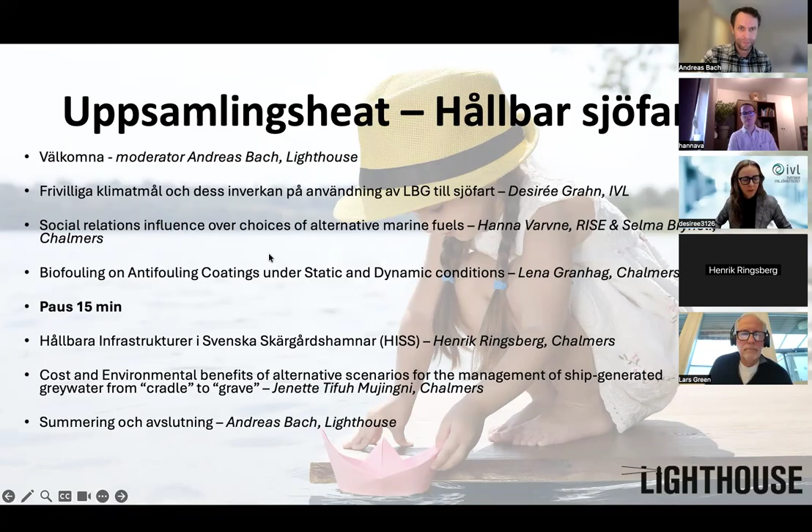Great to be here, nice to see you that I can see. My name is Desirée Grahn, I'm a project leader at IVL Swedish Environmental Research Institute.

I will present the project we have run that just been finalized, called Voluntary Climate Targets and their impact on the use of LBG in shipping. As Andreas mentioned, I've worked a long time within the biogas sector, but not that long within the maritime and shipping sector, so I'm very excited about this and learning about it together with my colleagues who have worked in that sector for a long time.

This project we have done together with Uppsala University, Björn Samuelsson there. Let's see if I can switch the picture. Can't see that I can, maybe here. Did you see the next picture now?

Yep, great. So this is the outline of my presentation. First a short introduction to IVL, then what our project has been about, and then some parts of the project: voluntary and legislated climate goals, mass balance-based models, and impacts on the use of LBG within shipping, and then some final remarks and next steps.

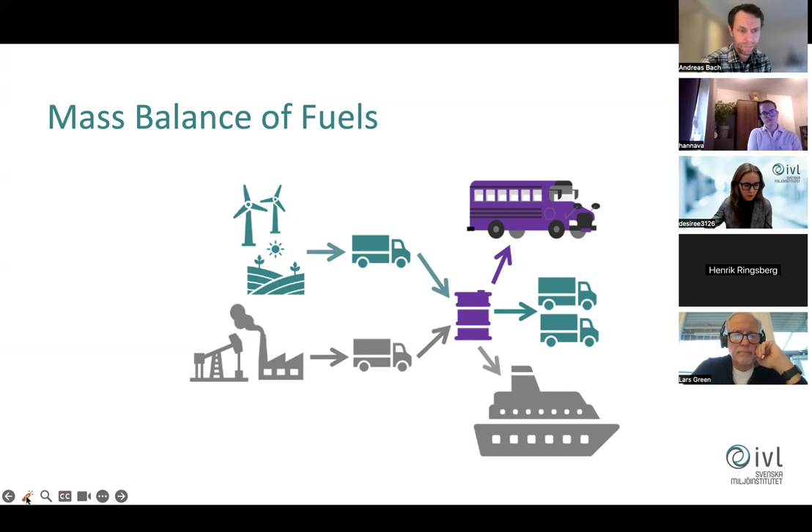Other than this type of setup, let me just turn off the pointer. You can also have a financial setup where one stakeholder is using the green fuel, reduces the emissions, but someone else is buying the emission reduction from the stakeholder. So they aren't actually using green molecules, but they're buying it from someone else.

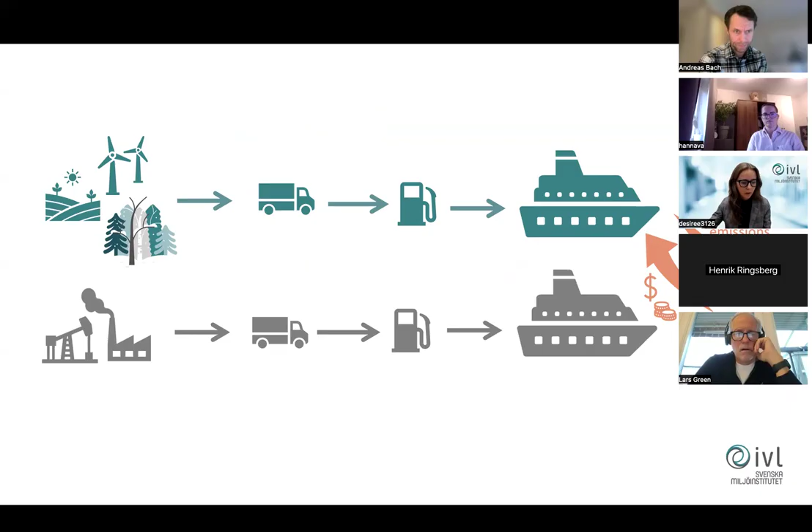So this could have consequences for the use of LBG in shipping. If we can't use mass balance-based tools, we could see a rapid increase in transport cost per cubic meter, which we have done calculations for in our report. It could lead to a higher price due to increased demand of locally produced LBG, which will take a lot more infrastructure and take longer time to get in place. That could also slow down the development of new production, since we use a lot of mass balance-based tools right now.

But we are thinking that it might lead to an increase in production of Swedish LBG, since we have to have it locally, close by. The biogas producers in Sweden, a lot of them that we've spoken to, don't agree with us on this, but let's see.

Reliable third-party certification is key to making this fly, to making stakeholders willing to use these mass balance tools. So I'll lift that again.

So just some final remarks. As we've seen working with this, a dear child has many names, as we say in Swedish, kärt barn har många namn. We have a lot of different names for these mass balance-based tools. They are often mixed up, and it's not very clear what is what. So we have tried in this report and this work to clarify what is book and claim, what is offset, what is inset, to begin to get an understanding.

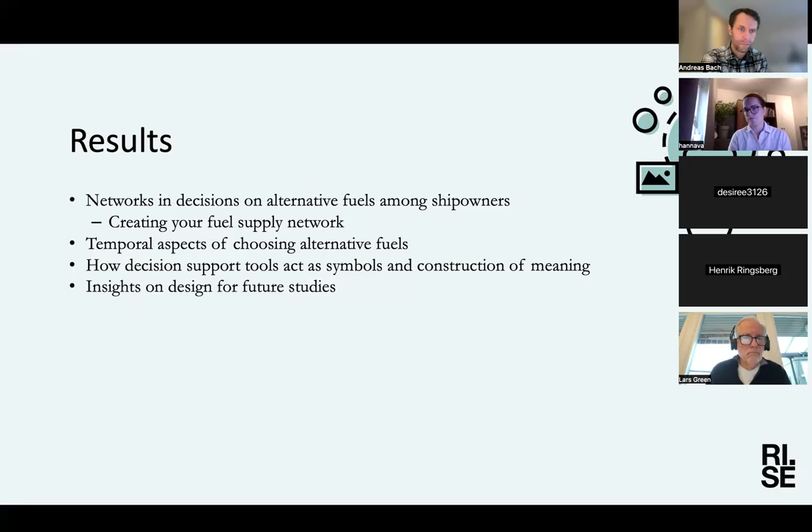So for future studies where you want to discuss these social relations or decision processes around alternative fuels, we believe you need a very strong connection to the organization where you investigate this. We are suggesting it should be close to an industrial PhD, or a very elaborate choice from the participating organization to share this kind of knowledge. One might need to be a bit cautious about how to design these studies in the future, because a lot of things are tangled up with trade knowledge and therefore very sensitive for commercial reasons.

If I can get it started.

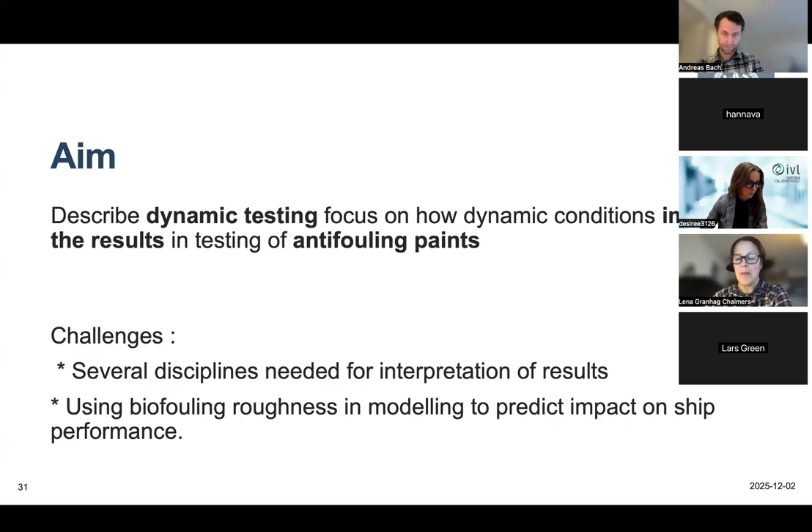Now I would say that the status in this area is that we work towards collaboration between industry and academia, as the paint producers have for a long time been doing dynamic testing, however from the angle or perspective of looking at the durability of the paint and how resistant the paint is over time.

Although these are not openly available results, we at least can have this discussion on a conceptual level, and what needs to be included. Somewhat closer is the aligning of methods within the research field to achieve sound interpretation and, above all, to be able to compare our results.

I would say there is a consensus between the industry, the paint producers, and the research too, that there is a need for standardization in the dynamic testing.

What we did, our method was a literature overview. We went through the most recent literature and found out that literature on dynamic testing of antifouling coatings is quite scarce, about 30 publications.

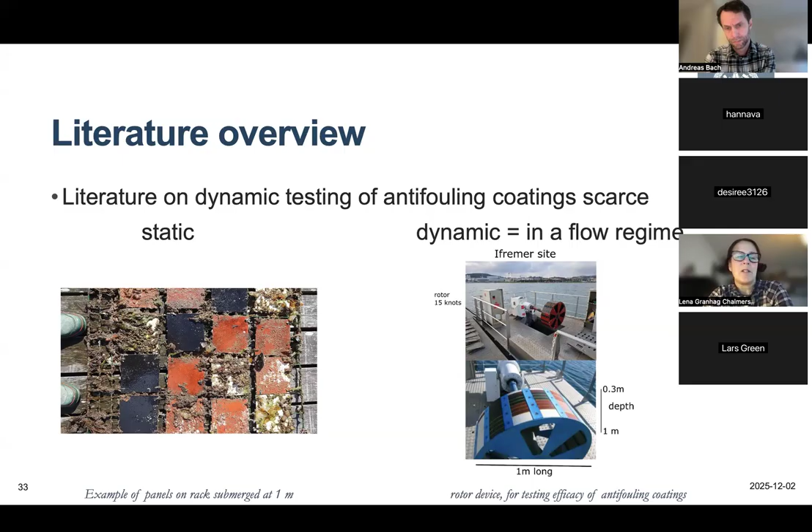While static testing, shown to the left, is really widespread with a lot of studies where you submerge panels in the port or harbor and let them stay there for like 6 months. To the right, you have dynamic testing, where you expose panels painted with different antifouling paints in a flow regime of some sort. This example is a rotor device for testing efficacy of antifouling coatings that has been used in the Mediterranean.

When we compiled the recent literature, we looked at what biofouling type was used, the dynamic setup used, and summarized the findings that were due to the dynamic condition.

From the results, we could see that under dynamic conditions, there was impact on the slime layer, which is the very first thin layer that consists of microorganisms like bacteria, microalgae like diatoms, and larvae of the organisms that will grow into the mussels and barnacles we can see. They have larval stages that also belong to this slime layer, and in addition, this slime contains a matrix of extracellular polymeric substances, which is very important for the attachment.

We could see that most impact was seen on the foul release coatings, but that doesn't mean they did better or worse, it just means they were more impacted. They could, for example, have more or less different organisms attached, or the attachment could be stronger, or they could be more strongly attached within this slime layer.

Now I'm starting to give you more information on the biofouling on the surface. The smallest organisms attached are about 1 micron, and then we have algal spores that are 10 times larger, but still very small. Everything is within these extracellular polymeric substances, meaning they cannot be viewed as single organisms, but rather as components of this layer. To the right you can see a larva of something that will later grow into a barnacle, and then the size gets quite much larger.

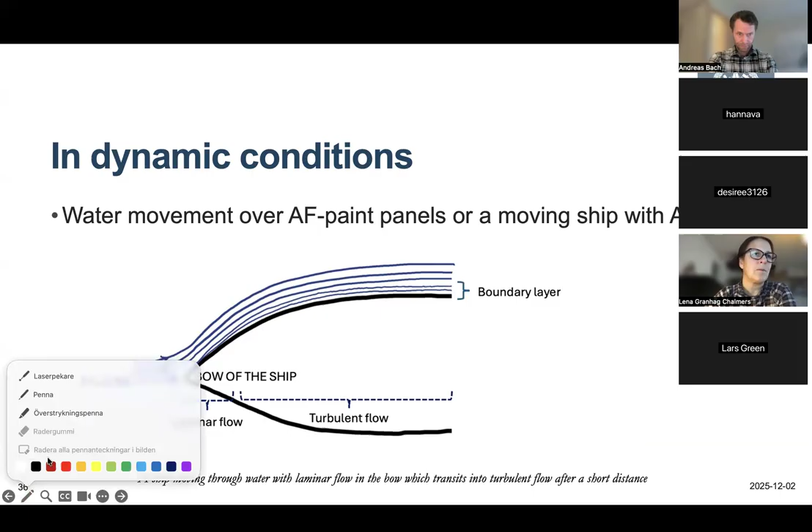If we look at what happens around the ship, the ship moving through the water will create a flow. In the bow of the ship, for just a few meters, you will have a so-called laminar flow, and then later it will turn into a turbulent flow. Just next to the surface, you will have something called a boundary layer, which is where the water flow is affected by the ship hull, or by being close to a surface.

So zooming in, the laminar flow will be water velocities that decrease when you get closer and closer to the ship hull.

And then later, when you have a turbulent flow, the water velocities will also decrease the closer you get to the ship hull, but there will also be a lot of those swirls or eddies, and the velocities will not be as parallel as they are here. Turbulent flow is the most common out in the sea and around the ship.

But every time you get really, really close to the surface, you will have something that looks like laminar flow. And at the very surface, there is something called a no-slip condition, where you have actually no velocities at all. For each velocity arrow, you have a corresponding force, which is what the barnacle will experience.

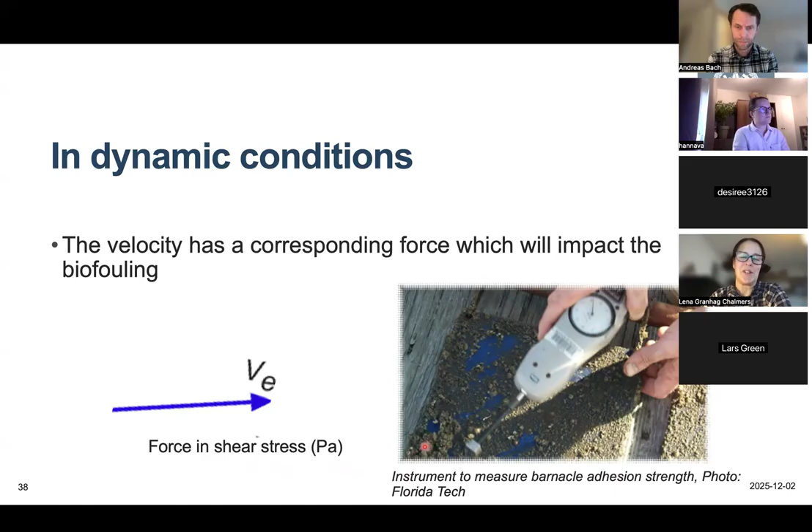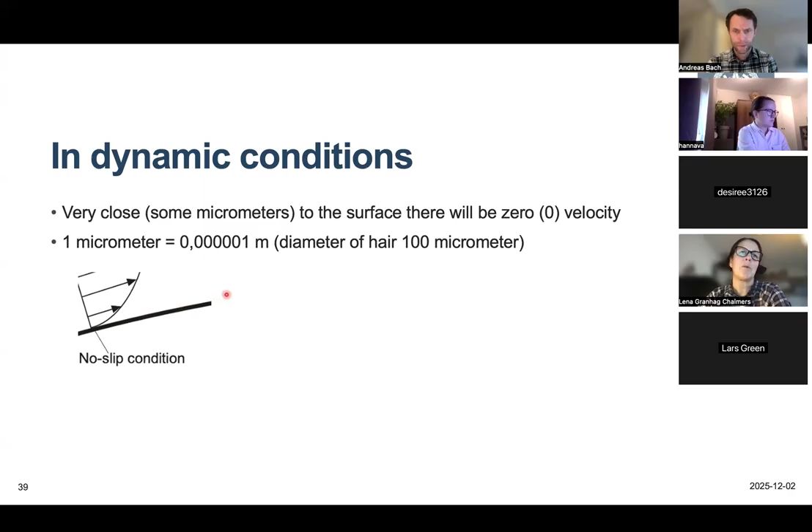It is a very close layer, the layer very close to the ship, just some micrometers from the surface, where there will be zero velocity. A micrometer is very small - the diameter of your hair is about 100 micrometers. So we are at really, really small scales here.

If we zoom in, the microalgae that I talked about that are in this EPS slime layer are about 10 micrometers, meaning they can hide in this layer very close to the surface where there are almost no velocities. So they will not be exposed to the force, and they can still be in this layer and use their glue and adhesive to attach. Where you have larger organisms like the barnacle larvae, they can also go in here, but of course they will experience some higher velocities.

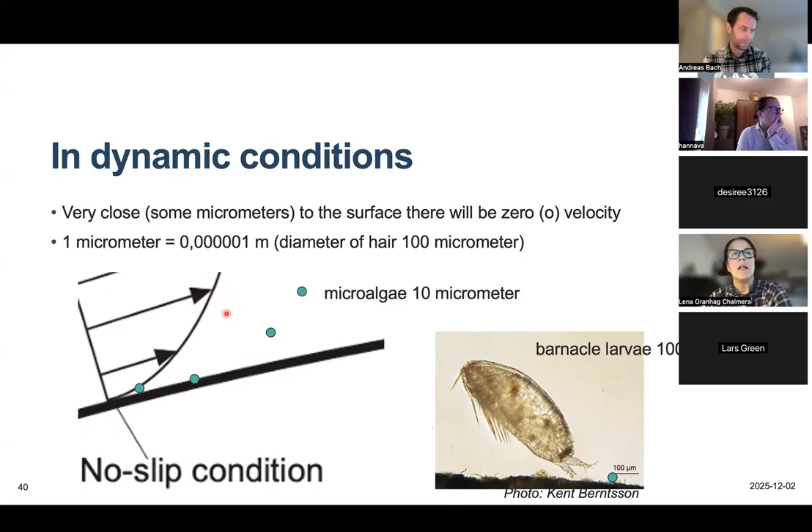I showed you two examples. It's said that about 4,000 different organisms live as attached life forms, meaning they only move when they are in the larval phase. Then they stay attached for 2 to 5 years, and they need a strong adhesive. The glue can look different - mussels, for example, have those threads of glue, and the barnacle instead adheres with a large part of the animal.

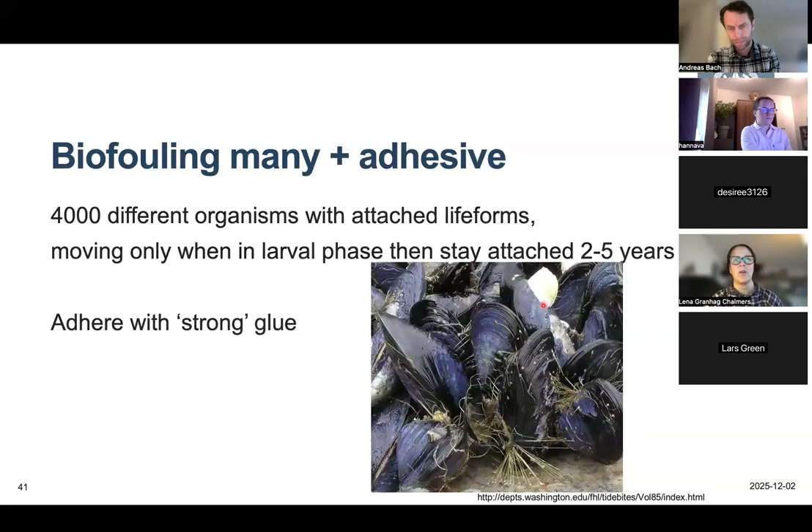And we want to see what happens in the dynamic conditions. It's not difficult to create dynamic conditions - there are actually a lot of different devices around, for example flow channels or flow tunnels. You can have rotating cylinders, sometimes called drums, or rotating discs, or you can actually expose your biofouling on a boat.

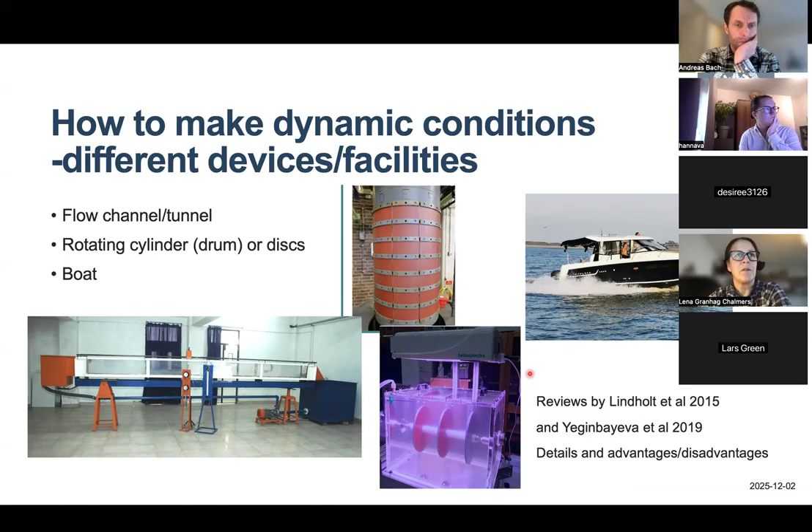There have been two reviews recently explaining the details of those and their advantages and disadvantages. So we instead went for the most recent literature, as I said. One thing that I pointed out was the difficulty of using this biofouling roughness when you want to translate it into ship conditions.

To achieve the most accurate results in this type of work, you need to use towing tanks. This is the large-scale testing facility used when trying out different boat models to see the resistance before they are built. They are around in some parts of the world, and they use already standardized measurements. However, it's very costly and time-consuming to perform this type of work, but to have really accurate results, you need this type of facility.

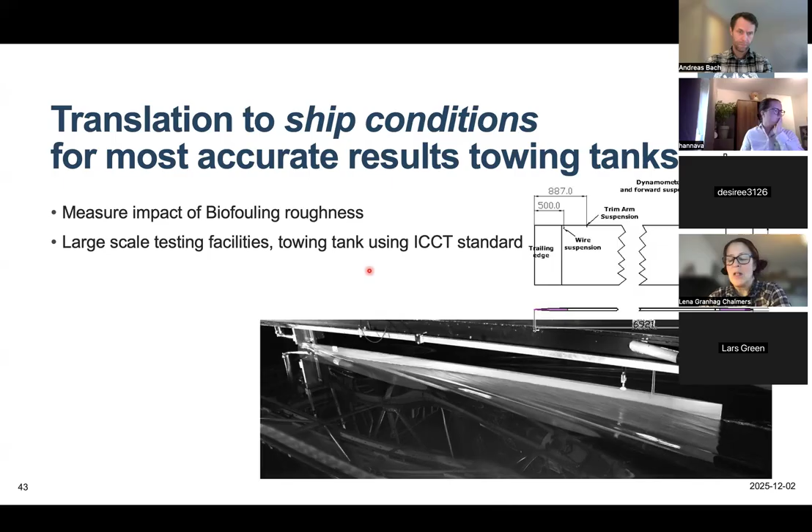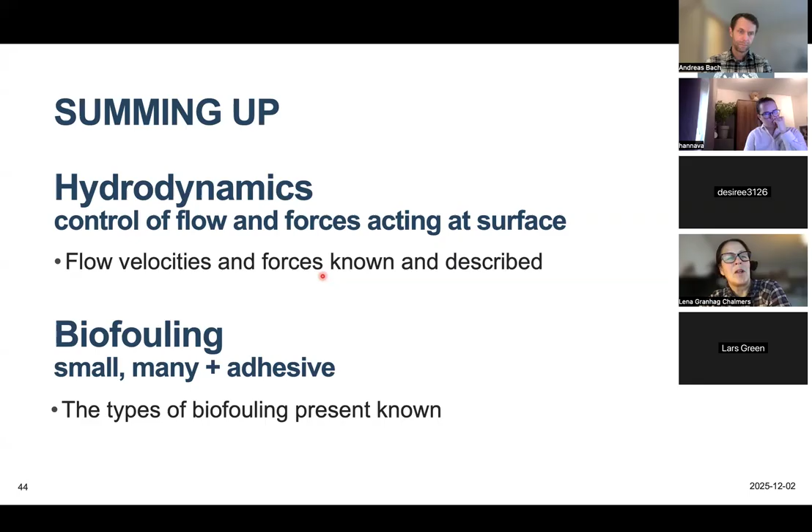And to sum up, for hydrodynamics, you need to have control of your flow and the forces that act on the surface, because otherwise you don't explain well enough what you actually have, how much force you have placed on the biofouling. You should also remember that the biofouling organisms are really small, there are many different sorts, and they have different types and strengths of adhesive. The types of biofouling you work with, you also need to know to get those characteristics.

So what we did was compare the static immersion tests with the dynamic immersion tests, and we looked at the main differences. The purpose you will use it for is the most important thing, but the big thing is that static immersion tests are quite easy to standardize, while dynamic immersion tests are more difficult to standardize. So that is where we are right now - working on how we could standardize those tests.

So you need to select your dynamic method depending on the purpose of your testing, and you need to be aware that several factors will impact the results. To solve this, we suggest a multidisciplinary approach, combining biology, hydrodynamics, surface chemistry, and physics to be able to interpret the results accurately, and again, work towards a standardized approach. Yes, thank you.

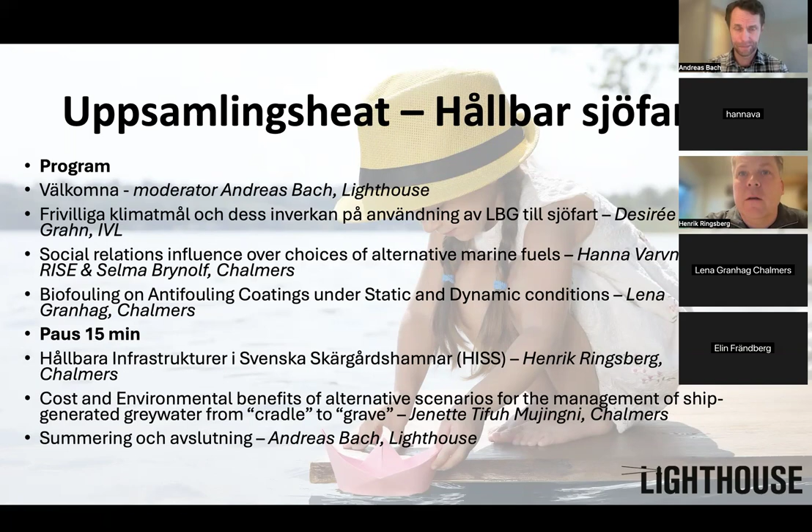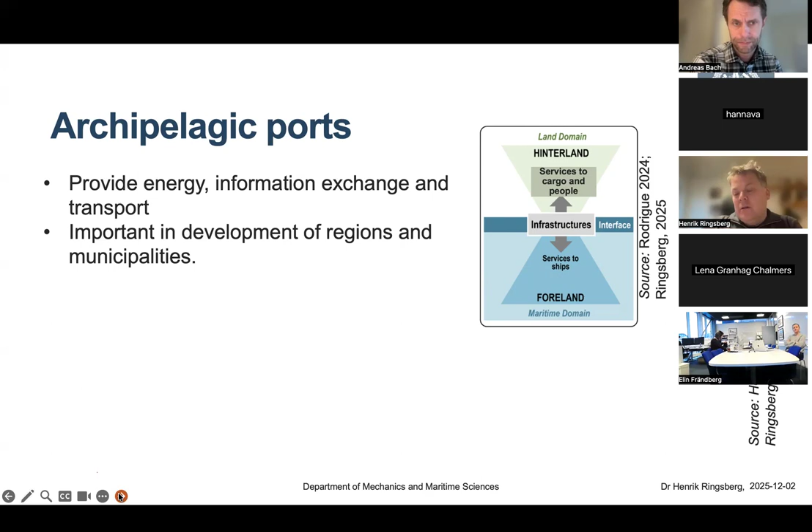As you already know, archipelagic ports have become increasingly important due to provision of energy, information exchange, and transport, but also due to the development of regions and municipalities. In addition, the industry has received increased requirements regarding development, sustainability, and demand for multimodal, intermodal transport in the nodes of transport systems.

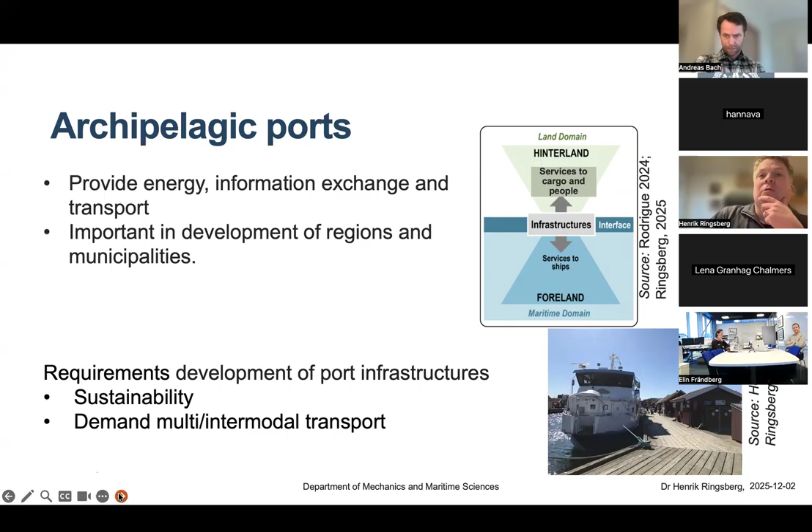So the HISS project focuses on regulatory policies and strategies in development of archipelagic ports at public and local authorities, but also on challenges that public authorities experience in their societal planning of archipelagic ports.

We used the following two research questions to explore policies, strategies, and challenges: which challenges exist in planning of sustainable development of archipelagic ports, and how do regional and local authorities comply with these regulatory requirements on sustainable development of such ports?

We started with a structured literature review on the subject, which was later followed up with a case study of regions, local authorities, and port authorities. The structured literature review looked into scholarly papers, but also published strategies and regulations found at EUR-Lex, IMO, and the Swedish Parliament.

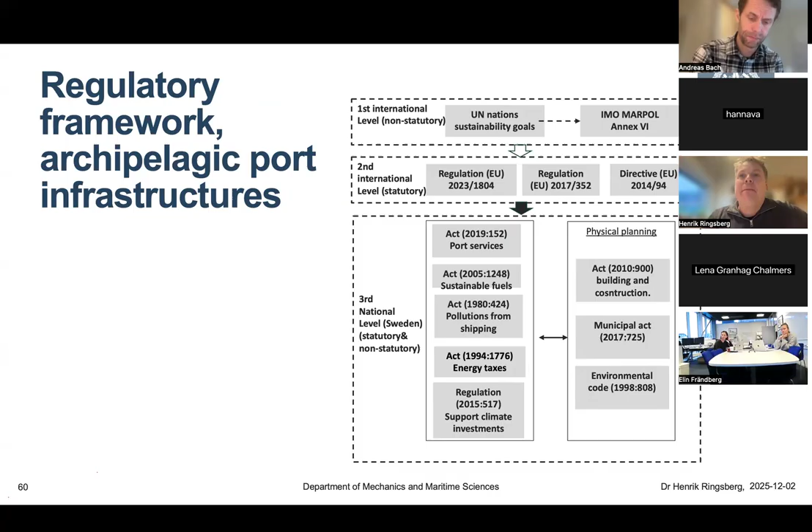When it comes to stakeholders' regulatory compliance, and especially their knowledge about these addressed regulations, we found that all level stakeholders lack in some way knowledge about regulation, especially on the first, international level. Regional level stakeholders possess knowledge on regulation at the second and third level, and local level authorities possess knowledge on the third level, which includes physical planning.

We also found that many master plans are not updated and thus need to be updated, since they have not been updated for 20-25 years. We also found that there is a gap between statutory acts at the third, national level and implementation of regional policies.

When it comes to challenges, we found first that challenges regarding collaboration, communication, and governance include a lack of collaboration, but also a lack of a structured business forum for collaboration between the different stakeholders. This communication is also very informal and driven by personal networks or industry networks.

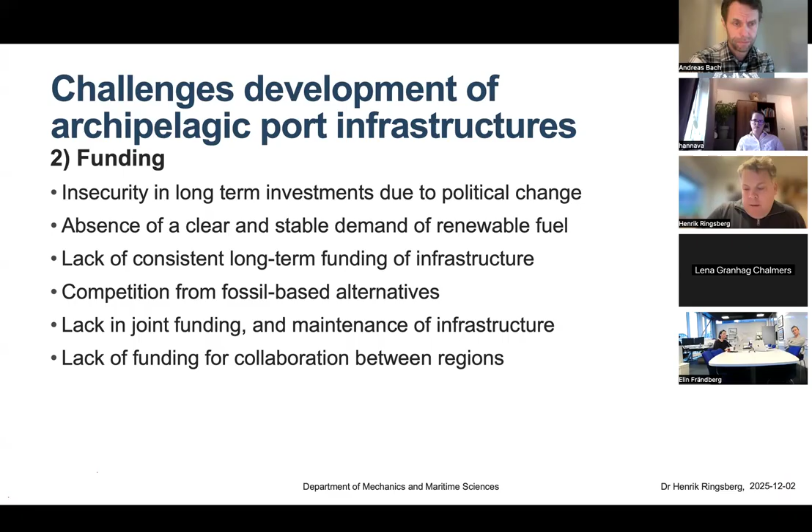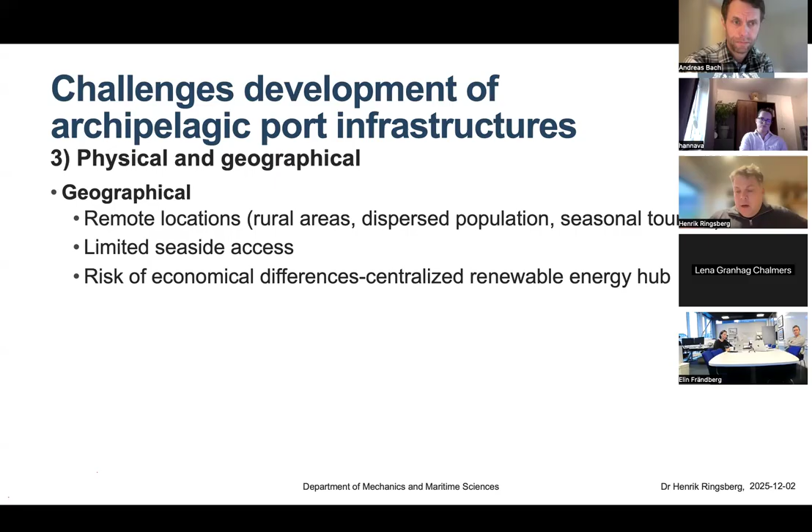Finally, we have the physical and geographical challenges, such as the challenge of remote locations, because archipelagic port infrastructure might be located in a remote area. But we also have physical challenges, such as limitation in physical space, depth limitations, outdated infrastructure, and lack of standards when it comes to technical requirement specifications.

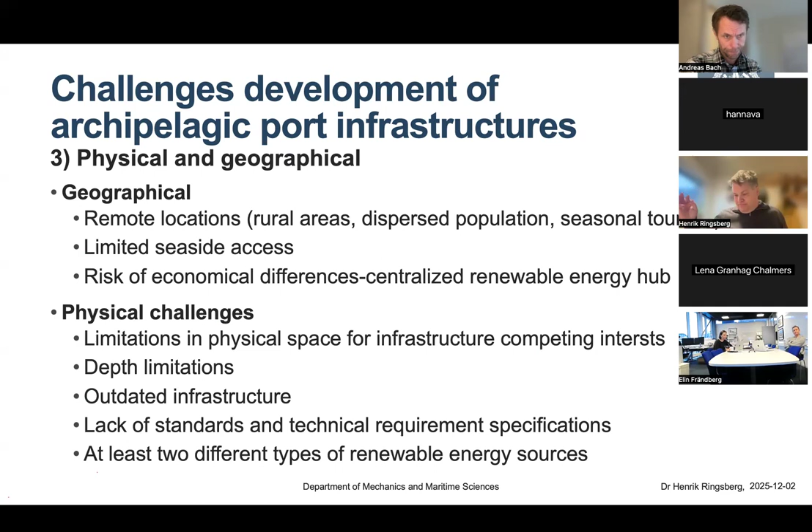To summarize our study, it shows that there is limited knowledge about statutory regulatory guidelines when it comes to development of archipelagic port infrastructures. We also found some challenges that should be considered for development of archipelagic port infrastructure. I will stop here, saying thank you, and ask if there are any questions.

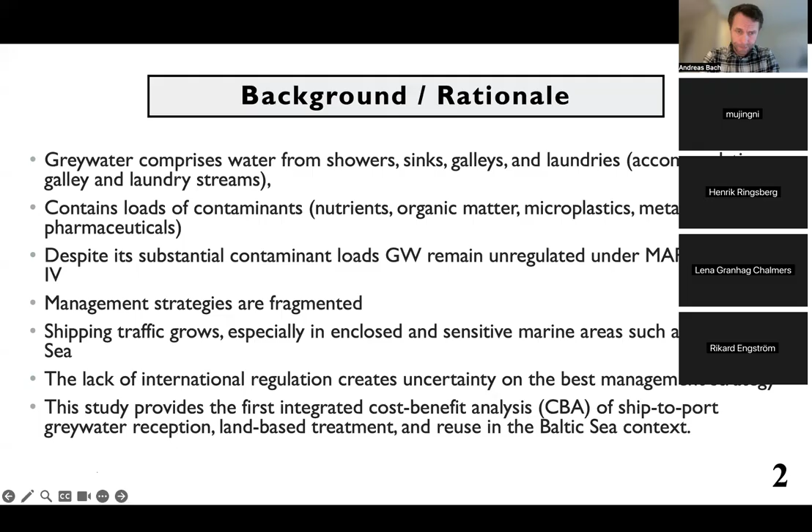So the aim of the research is to study the characteristics of greywater on board ships, specifically RoPax ships, and then to model scenarios using Trelleborg as a case study. We then went further to use these characteristics of greywater to derive shadow prices.

I don't know who's touching the screen.

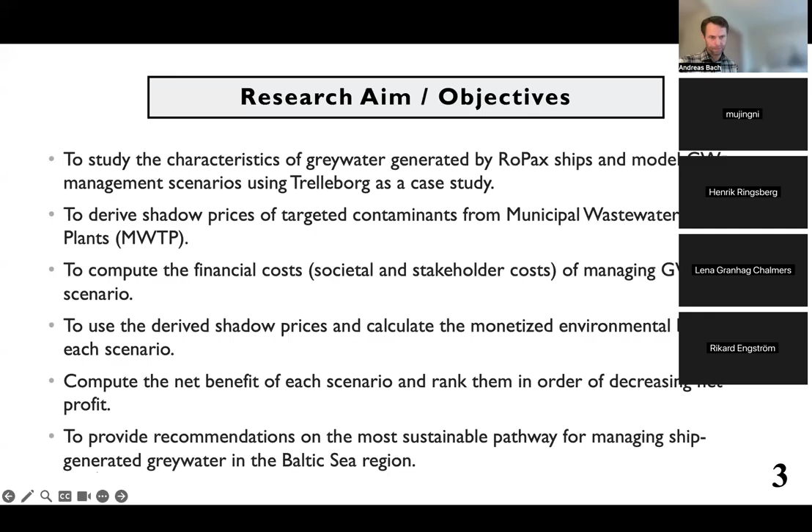To derive shadow prices for greywater contaminants, we also calculated the social and stakeholder costs of greywater management and the environmental benefit, which was used to obtain the net societal benefit using the cost-benefit analysis methodology. At the end, we provide some recommendations.

So we use the greywater management treatment system in Trelleborg, because Trelleborg is an important port within Skåne, within Sweden in general. It is one of the two ports that possess a port wastewater treatment plant, and it's a major hub for RoPax ships within the region.

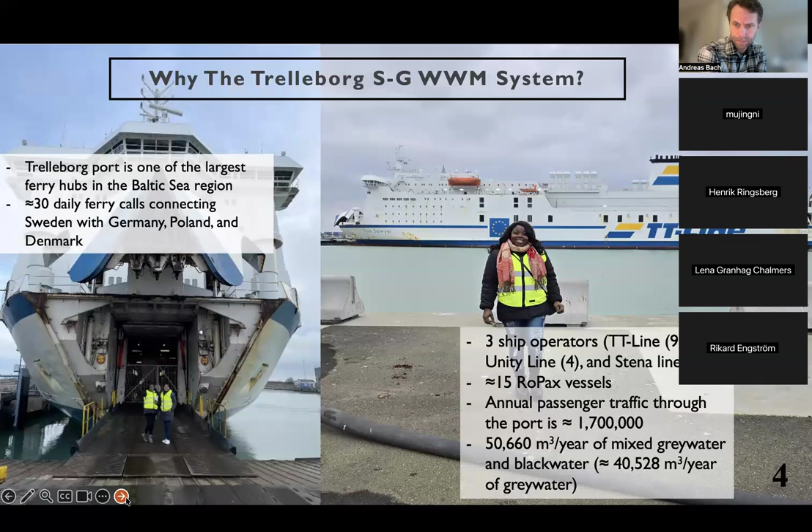The greywater generation within Trelleborg, annual generation is about 40,000 cubic meters per year.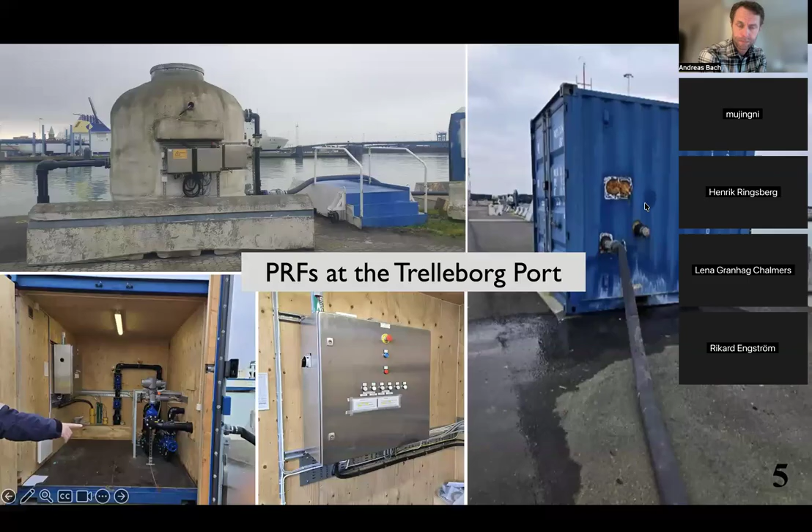So when greywater is generated from the ship, it is discharged and received by port reception facilities. This is an example of port reception facilities found at the Trelleborg port. With this one, it receives both greywater and black water, and it also delivers fresh water to the ships.

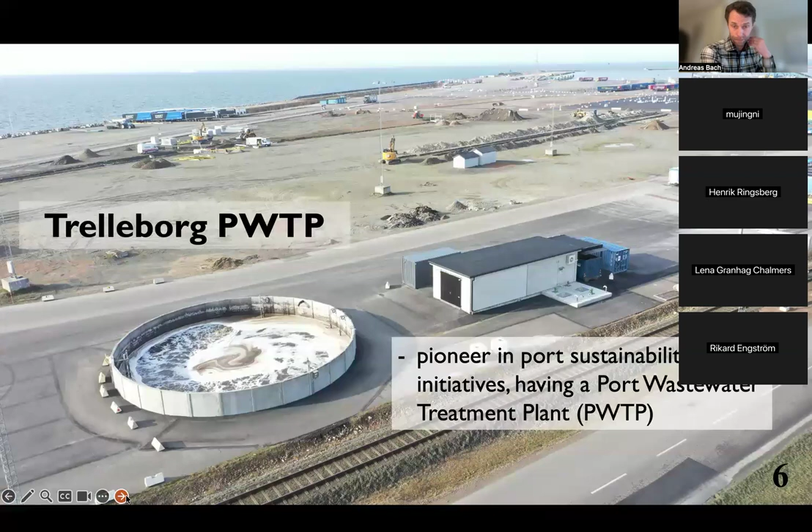Then from the reception facilities, these facilities have underground pipes that lead the wastewater to this area, which is the port wastewater treatment plant. You have a very big basin that receives the water, and reactions happen there; we don't go into the details. Inside the treatment plant, there's a whole lot of processes and interconnected pipes that treat the wastewater.

It is important to state that at the Trelleborg port, this treatment plant actually mixes black and gray water. It doesn't treat only gray water, but treats black and gray water. But for our modeling, we are looking at and modeling only gray water, not black water.

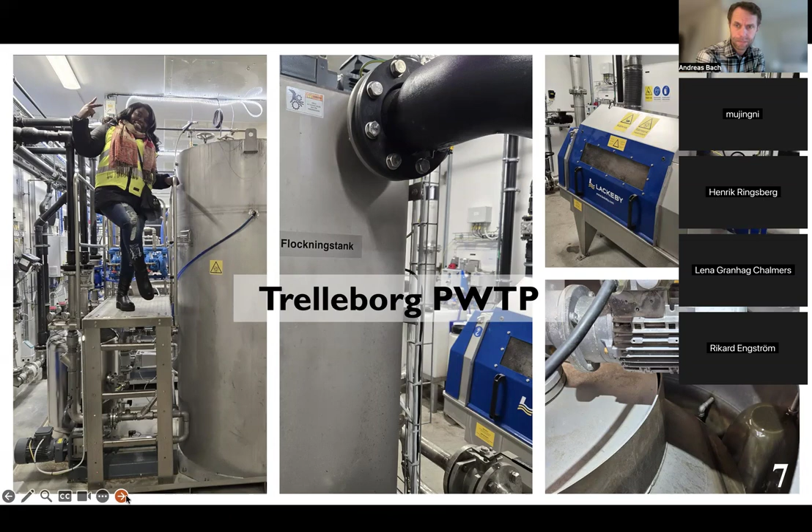Then it leaves the port wastewater treatment plant and goes to the Trelleborg municipal wastewater treatment plant, where it is finally treated and discharged into the sea. So this is the system that exists at Trelleborg.

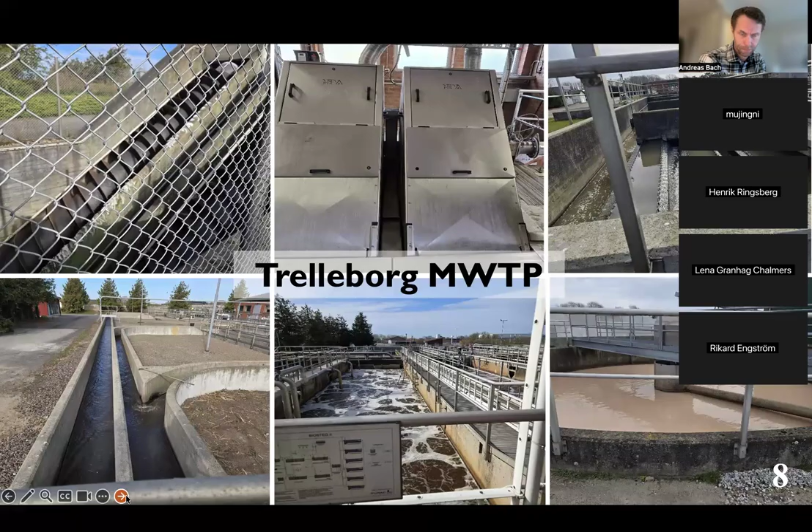But for the purpose of this study, we actually modeled 5 major scenarios, and the fifth scenario is also divided into 5 major scenarios. So we have 5 non-reuse scenarios and 5 reuse scenarios.

For the first scenario, gray water is discharged directly into the sea after treatment, after generation. The second one, it is treated in an advanced wastewater treatment plant before discharge.

In the third one, it is delivered to port reception facilities and treated at the municipal wastewater treatment plant before discharge. This scenario 3 is the exact scenario that takes place at Trelleborg, and it takes place at many ports within the Baltic Sea.

The fourth scenario also takes place at Trelleborg, where gray water is discharged to port reception facilities, further to the port wastewater treatment plant, where it is pre-treated and then discharged to the municipal wastewater treatment plant before it is treated and discharged into the sea.

For the fifth scenario, we try to model reuse of gray water. We want to think about what if we reuse gray water after treatment at the port for various non-potable purposes. So gray water is discharged to port reception facilities, is treated at the port, and in scenario 5A, it is discharged directly into the sea after treatment.

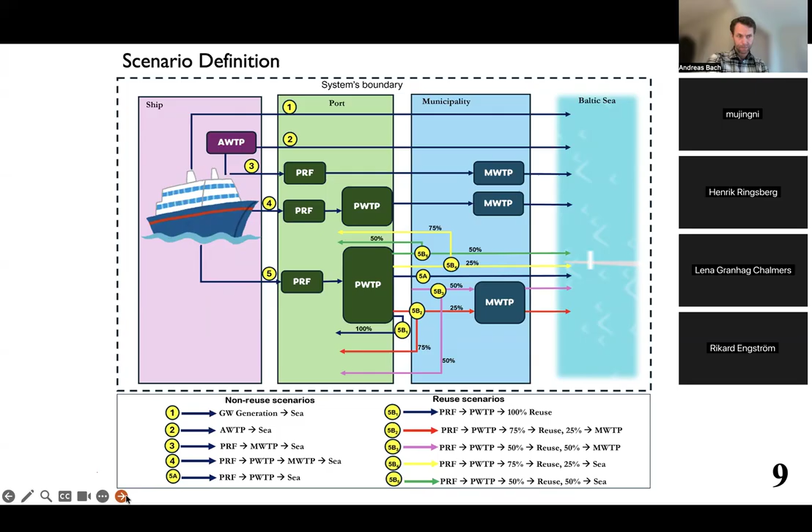So the methodology we choose is cost-benefit analysis, a fundamental environmental tool for evaluating environmental management strategies. It enables policymakers and stakeholders to compare the monetary value of cost incurred with the benefit of avoided damage or improved environmental quality.

The key methodological challenge in cost-benefit analysis of ship gray water is the evaluation of environmental externalities, since they do not have any market value. Therefore, we use another methodology called shadow pricing to estimate the monetary value of these environmental externalities. Shadow prices are just like PNEC values, predicted no effect concentration values, that are calculated, and any researcher can use these values as models in their own research.

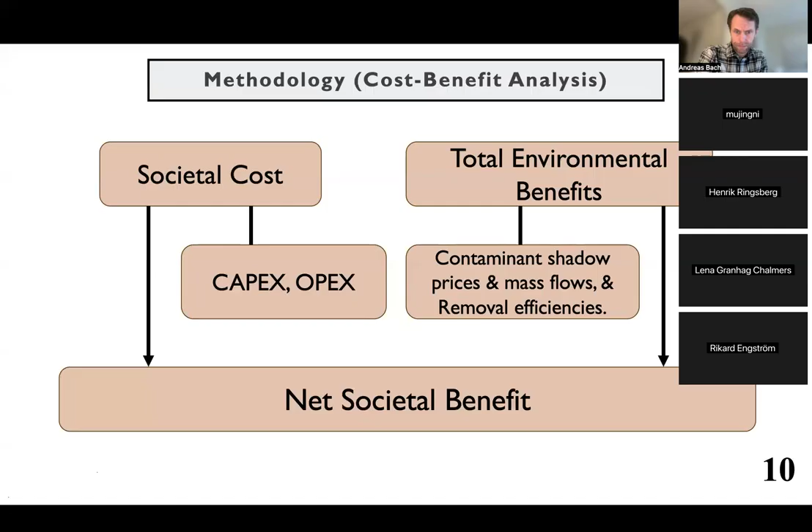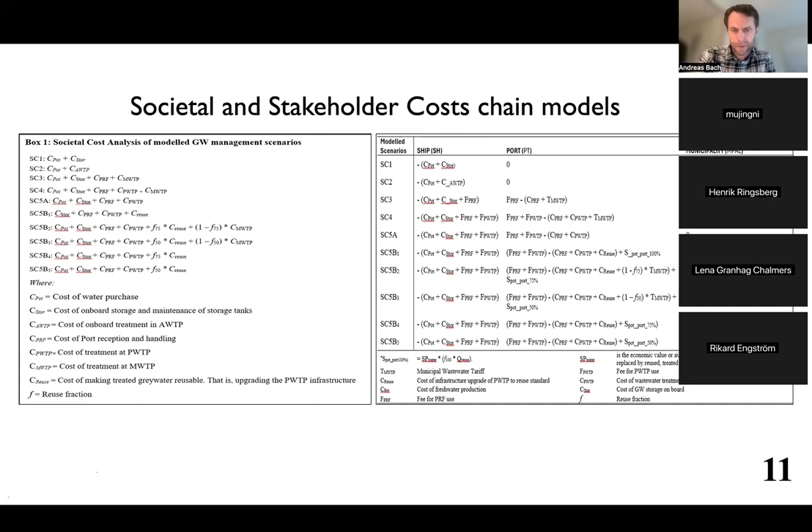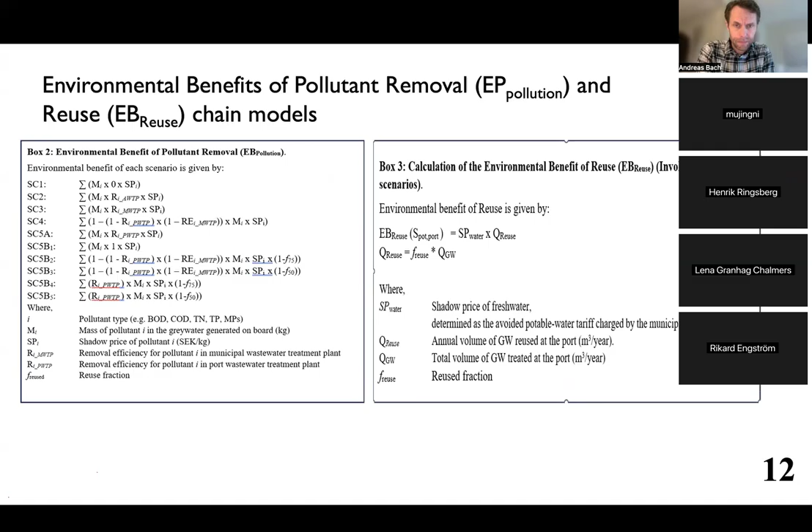Now, the net societal benefit is obtained by subtracting the societal cost from the environmental benefit, and then you get the net societal benefit, which you will see. So we derived a whole lot of cost chain models, which I won't discuss here because it will be too long, but also environmental benefit cost chain models for these calculations. I will go straight to our results.

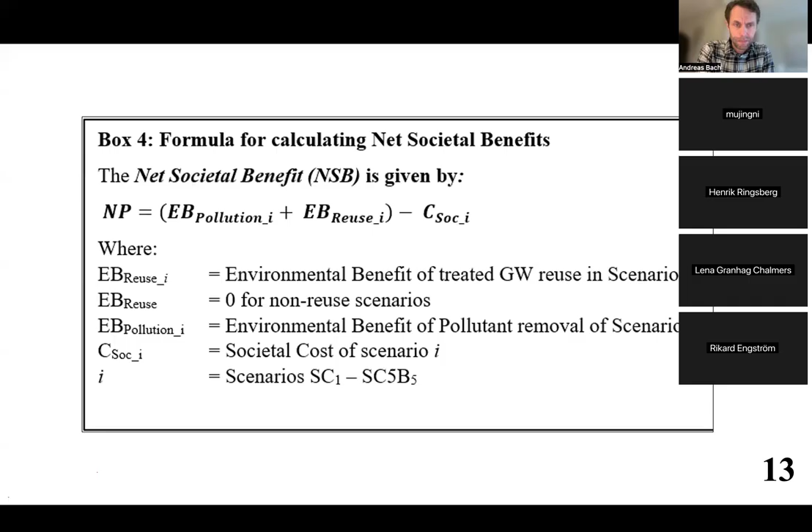As explained before, we have the net societal benefit, which is the total environmental benefit minus the societal cost. So we obtained shadow prices of contaminants. Some of them we obtained from the literature, and others we calculated. We realized that zinc and copper have the highest shadow prices, and the negativity of the shadow prices indicates the marginal societal damage cost of releasing 1 kilogram of this pollutant into the sea.

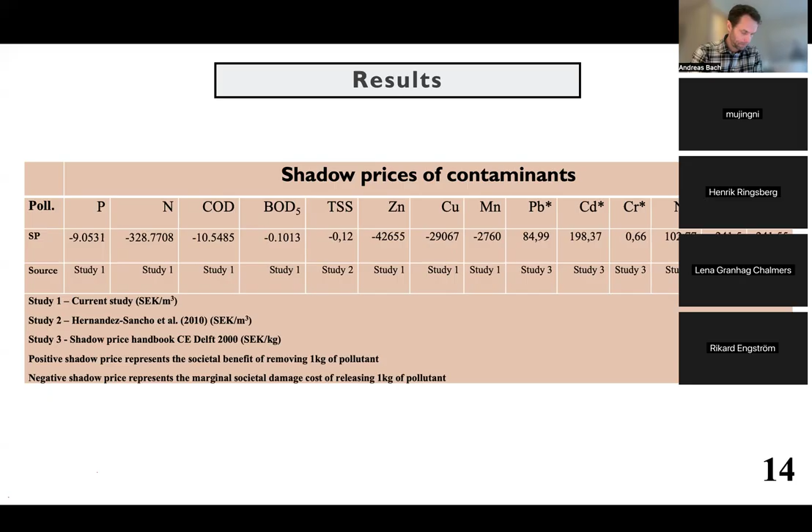Any scenario that has high removal efficiency of the contaminants with high shadow prices means those scenarios are highly environmentally beneficial. Okay, so...

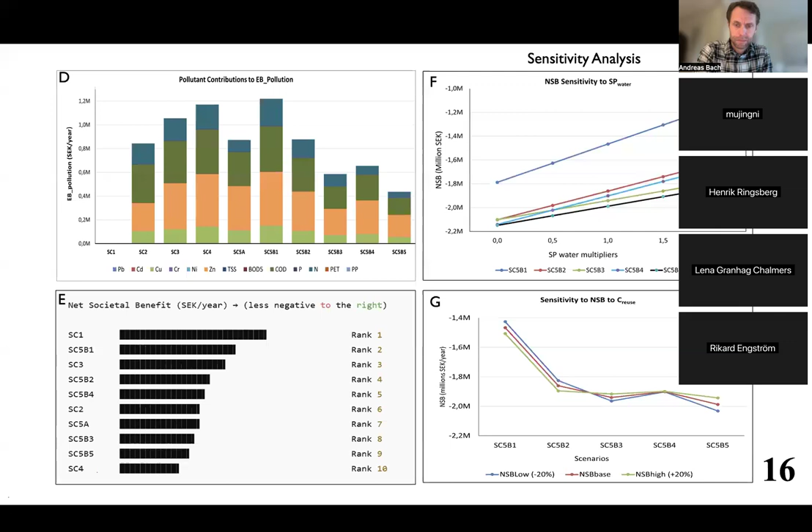This also means that even in different places in the world where reuse need might be high, like in arid regions, 100% water reuse will still be more highly beneficial than 25% or 50% water reuse. From this we want to conclude that grey water treatment alone is not really enough for substantial or sustainable grey water management.

Reuse, as we have seen, significantly improves the societal performance, so it is highly encouraged. Partial reuse scenarios, where part of the grey water is discharged into the sea, part is reused, and another portion is treated at the municipal wastewater treatment plant before discharge, offer the most favorable trade-off between the environmental benefit and the costs.

Stakeholder incentives are misaligned, as ships pay more than the ports, and the municipality is on neutral ground because even though it incurs the cost of treatment, it passes charges onto the port, and the port in turn passes charges to the ships. So the ship owners pay the most.

If we look at the first scenario, direct discharge into the sea, only stakeholders with environmental stewardship would look for reuse or other waste management options, because there is no regulation and no obligation to discharge to port reception facilities. So a ship owner who is not environmentally conscious would simply discharge into the sea.

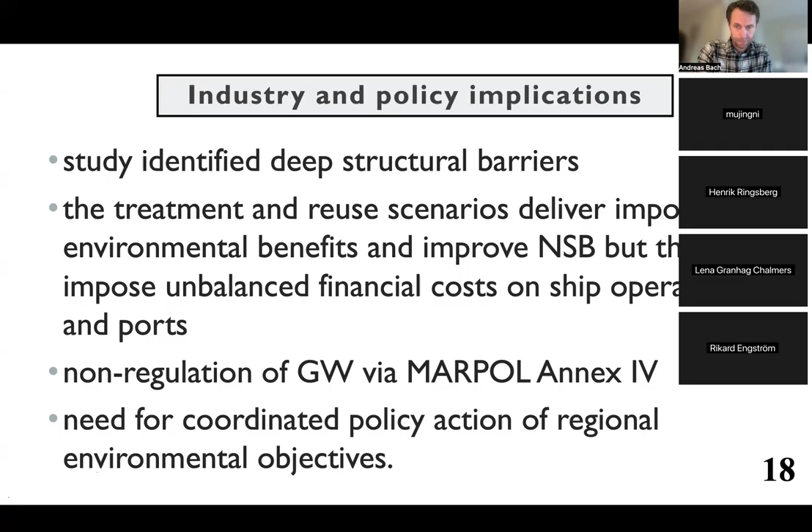But this also imposes high treatment costs on stakeholders, so stakeholders might want to choose the treatment that would favor their operational costs. The non-regulation of greywater in MARPOL is one big impediment, as previously said.

And so there is a need for coordination at the policy level. We also have a few limitations of the study I want to speak about.

We have the data availability issue. We didn't really have exact data. These systems are very complicated, so our data was mostly based on proxies, and because it is a model, it has to do with estimates. So it's very important that such studies consider engineering systems in the particular system where the study is being carried out.

We also have system performance uncertainty. And the study did not consider future trends, like greywater or water cost trends in the future. So further or subsequent studies will have to consider that.

We will have to say that there is a need for coordination among the stakeholders. For ship operators, first of all, we want to emphasize the value of delivering to port reception facilities rather than discharging into the sea.